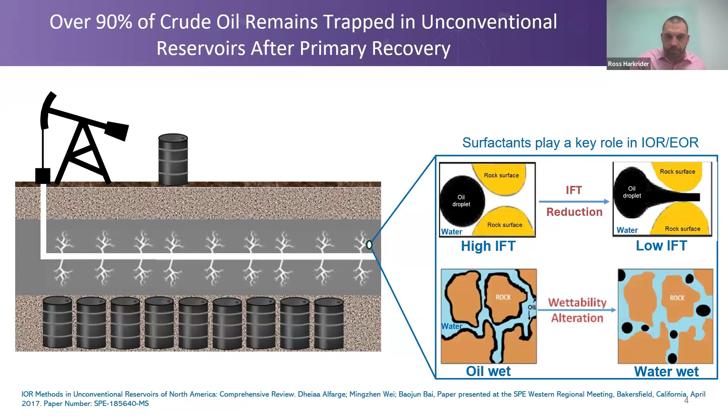Okay, so I want to take a deeper look at what is a surfactant, how does it work, how can surfactants increase our production? We'll take a small brief look at the formulation process, and then we'll look at some samples from the lab and the field, and then we'll wrap up with any questions that you might have.

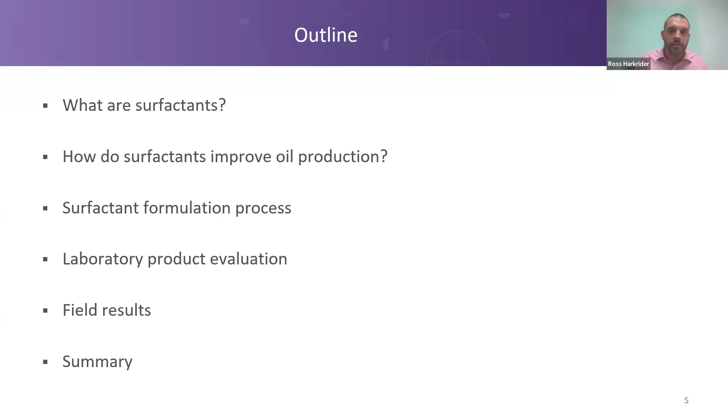Okay, so what is a surfactant? A surfactant is basically 2 components, a head and a tail. The head part is naturally attracted to the water portion. It is water soluble, or also known as hydrophilic. The tail portion is going to be naturally attracted to the oil substance. It is oil soluble, or called hydrophobic.

As we move into the 2 areas that surfactants can impact, interfacial tension and wettability, surfactants want to move to the interface of whatever substances we're looking at. So if it's interfacial tension, we're working with 2 liquids here, the oil and the water. The surfactant wants to move to that oil-water interface, thereby interacting and impacting that interface between oil and water.

If it's water and the rock surface or oil and the rock surface, again, the surfactant wants to move to that interface, thereby interacting with that interface and hopefully, potentially changing how that interface reacts.

If you know anything about surfactants, there are thousands of different types of surfactants, which can make the world of surfactants kind of daunting. So many different types of surfactants. How do I choose a surfactant? But basically, surfactants can be categorized into 4 big areas. We have non-ionic surfactants, anionic, cationic, and amphoteric.

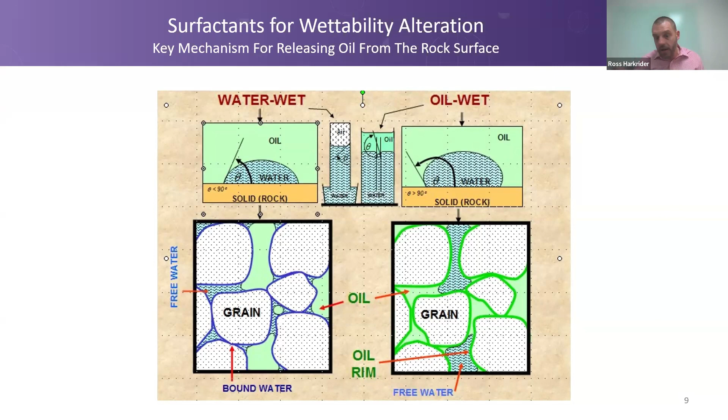Okay, so now moving into what exactly does wettability alteration mean? What exactly is it doing? I love this example because I think it's so simple and probably every single person is familiar with it. When you're at home washing your dishes, you put some soap on your dishes, and that soap helps lift the grease or the oil off the face of your plate.

That is exactly what surfactants can also do for our reservoirs. They are lifting the oil off the face of the rock that may not be produced otherwise. You might be able to scrub really hard on your plate in your kitchen and you just can't get the grease off. But when you add a little soap, all of a sudden that grease comes off your plate.

And in the same way in our reservoirs, we might do certain mechanical things to try to increase production, but eventually we're going to get to a point, which is what we're seeing in the industry, that we just can't get any more oil out. So what do we do? We've got to start doing something different, and customizing surfactants is one of those different mechanisms. So there's two things that surfactants do when it comes to wettability alteration.

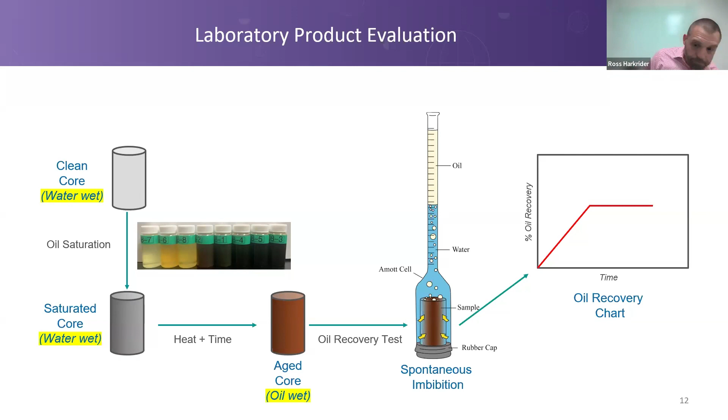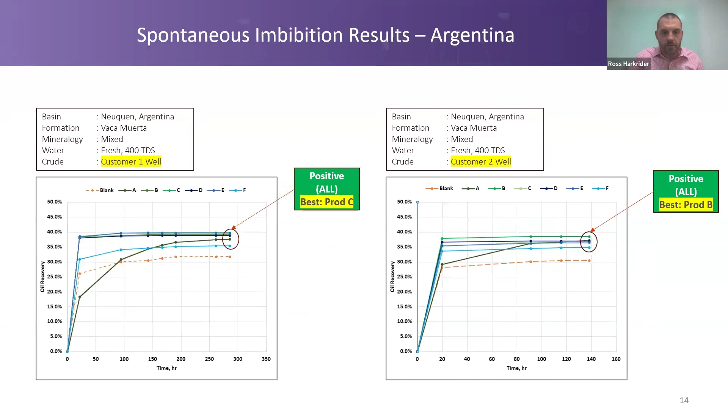Regarding how do the Amott cell results compare to real world conditions in the wells under higher pressures and temperatures? Okay, so probably another way to ask this question is how do we translate lab results to field results, right? Let me just move back here to slide 13.

One of the reasons is because the lab environment is a very controlled environment, right? That's why we do it in the lab, because we have control over all the variables. When we move out to the field, we don't have as much control over many of those variables as we do in the lab. And so it's really challenging. It really probably doesn't matter what you're testing. There are many things that you're going to test in the lab, and it's going to respond differently in the field.

But what we do say is that if we can see an increase in production over a period of time, so for example, when we look at this case study here in the Middle Bakken, when we did the lab study, this is exactly what we showed. We showed that this product would increase production. Now, the actual value that we got in the lab was not translatable to the field, but it was translatable in a sense that applying this surfactant will give you more production than if you didn't apply surfactant at all.

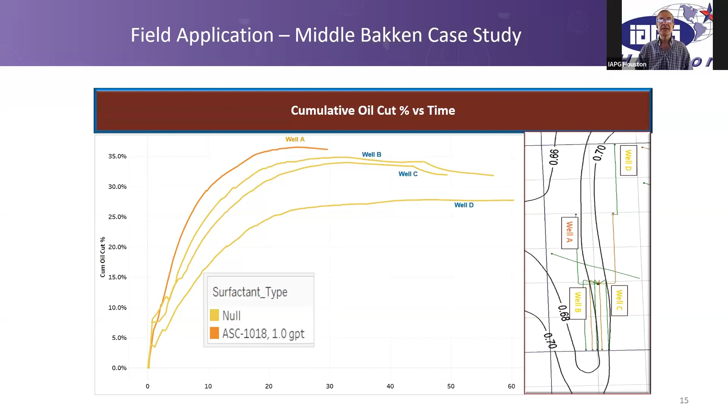Okay. On page 6, you'd mentioned the various types of surfactants, the non-ionic, anionic, cationic, and amphoteric. What do you take into account when you're selecting which ones to use? So basically, we want to understand the system, and if there's going to be a negative reaction between a surfactant that you're considering and the system, then we try to stay away from those.

So here's an example just from an application standpoint. There are many friction reducers that are being used during frac jobs today that do not interact well with a cationic surfactant. And so just from a design perspective, we're like, well, we know that they're pumping friction reducer, therefore we cannot use a cationic. So it's not only just understanding the system that you're working with, you also need to understand what else you are injecting into the formation, whether I can use this surfactant or this surfactant over here.

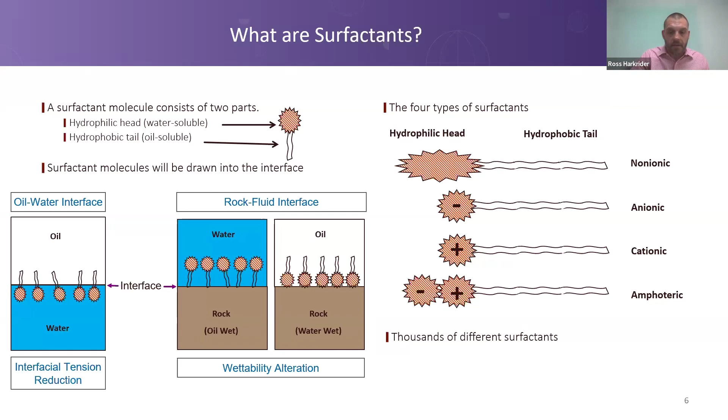So the % concentration can vary from system to system. That can even be one of the variables that we can test for. Let me move to this chart here. The concentration can be one of the variables that we test for. We do see that concentration can play a factor. So actually, if you move back to

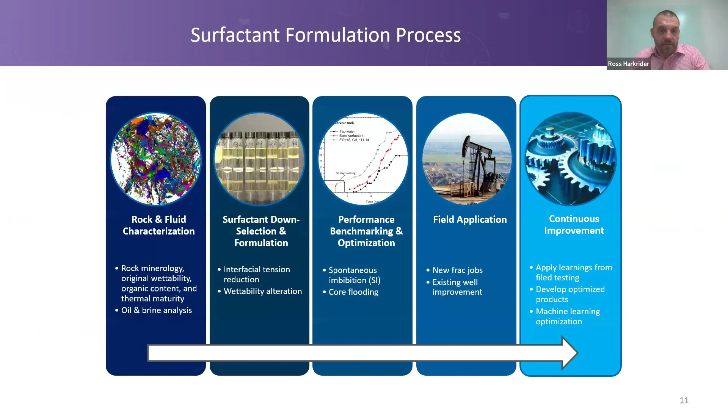In general, we're not adding tens of thousands of gallons, right? It's more on the range of 1 gallon per thousand, 2 gallons per thousand, half gallon per thousand. Somewhere in that range is where most people are designing their surfactants for a given system. I think the second question was, how long do you apply a surfactant?

Now, eventually surfactants are going to be in some ways used up, right? Either it all got produced over a certain period of time, or all the surfactant ended up coming out of the reservoir. And so we actually believe that continual usage of surfactants can benefit the life of a well.

Now, the frequency, I don't necessarily know the frequency. That can probably depend on the type of reservoir that you're working with, the operator, what they're trying to achieve. But there's a pretty big body of literature within water flooding. Surfactants have been used for quite some time in water flooding, and they're doing continual injection of surfactants in those

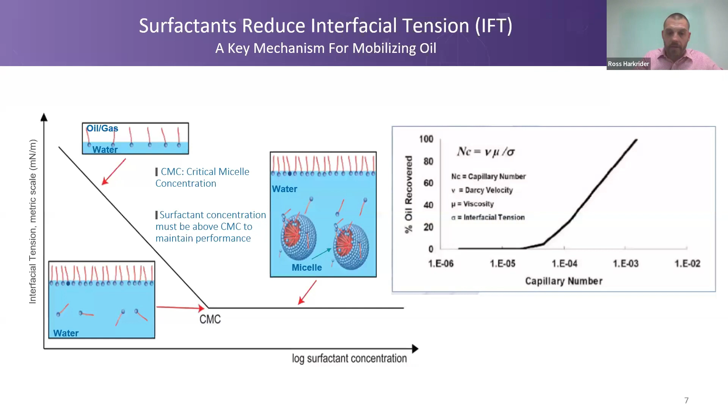Having said that, surfactants do have an uneven record of performance in improving reservoir and well productivity. Yep. Why is that? There's a lot of variables that every reservoir has. And so I'm going to move to this chart here.

Okay, this to me is a great example of trying to understand why does surfactant A work in one formation, but I go to another formation and surfactant A didn't do anything for me. Then I go to a third formation and it actually caused a negative result. It made things worse, right?